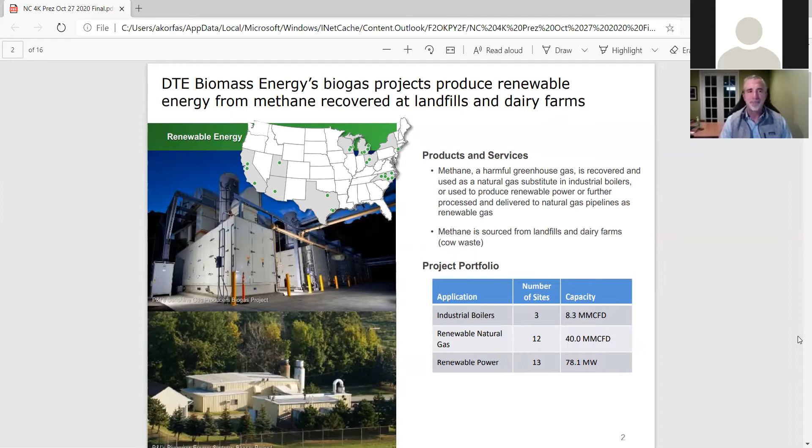We've got a fairly meaningful footprint here in the state of North Carolina, and we've got a long-standing relationship with the state. We operate 6 different projects across the state, with one of the largest in our portfolio being here in North Carolina, just outside of Winston-Salem. All of our projects here in North Carolina take biogas generated at landfills and use it as a fuel to drive either an engine or turbine-driven generators to produce renewable green electricity.

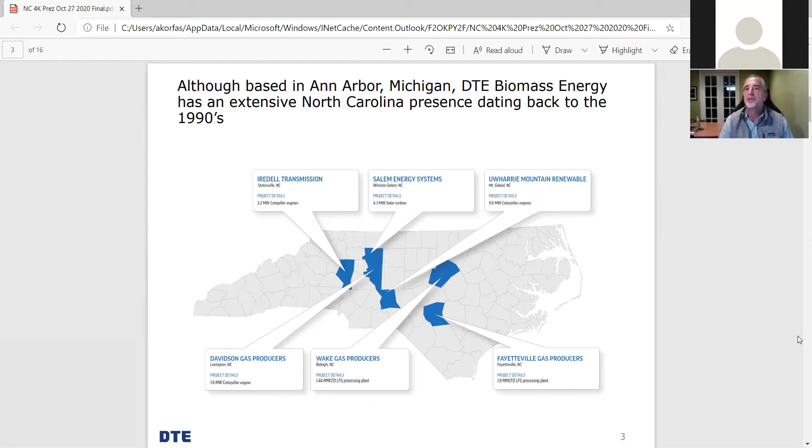So I thought I would set some high-level context relative to the external environment. I'm sure everyone is familiar with the discussion ongoing in the media and across the United States over the last several years around global warming, reducing greenhouse gases, and generally decarbonizing not only the United States, but the planet as well. This means reducing those byproducts that result from the combustion of fossil fuels, for example, to make electricity at power plants or to power the vehicles we drive. And secondly, to reduce those constituents that are naturally occurring compounds in our environment, such as methane. All of these compounds contain carbon, thus leading to the term decarbonization.

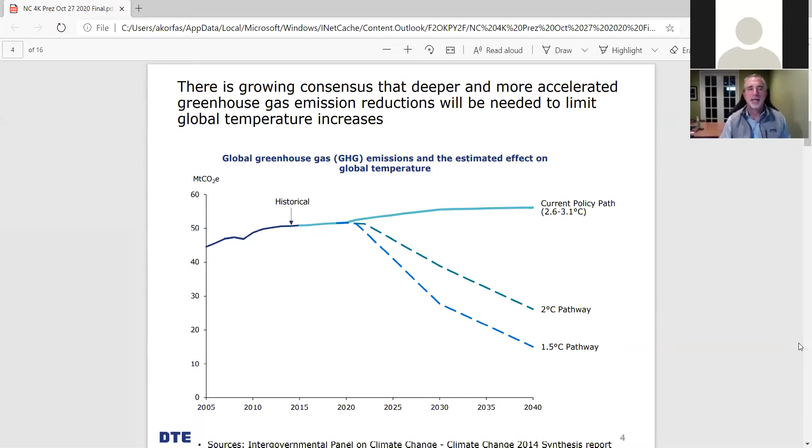So achieving carbon reduction emissions of this scale will require significant change to all sectors of the economy, not just on the power generation side. I think everybody's familiar with that and knows a lot about the wind and the solar and some of the biomass power generation that's talked about and done quite a bit of in North Carolina. But we're going to have to do some other things as well.

We're going to have to develop new, cleaner burning transportation fuels, for example, electric vehicles and hydrogen fuel cells. We're going to have to figure out a way to be more efficient in the energy we use, both in heating and cooling our homes and businesses. And finally, we're going to have to change some of our industrial processes as well, including capturing the carbon dioxide that's still emitted into the atmosphere, capturing it and then storing it underground as opposed to releasing it into the atmosphere.

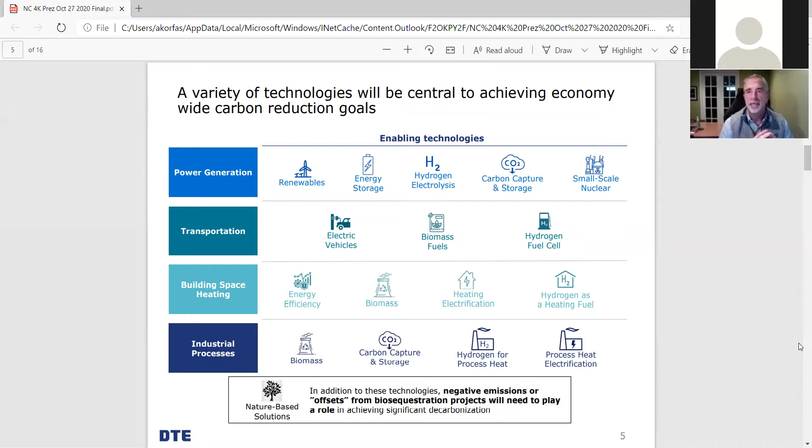So what's really cool about the work we do at DTE Biomass - we talked a lot about carbon dioxide emissions that occur predominantly at power plants and in transportation fuels, but methane is also a very prominent greenhouse gas. And even though there's not as much methane produced here in the United States, it's 23 times more potent than carbon dioxide, which causes us to really want to focus on it and reduce it.

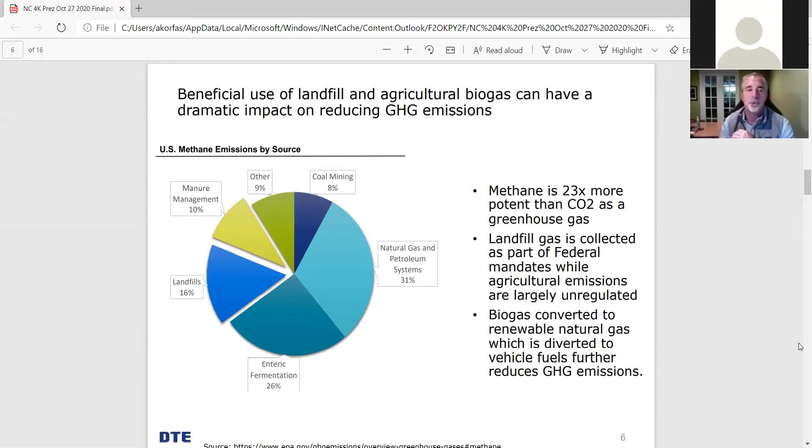When organic waste streams like manure, landfills, agricultural waste, and food processing waste decompose, biogas, which is predominantly methane, is produced, and we look to convert that to a beneficial use. Biogas, regardless of the source, is typically composed of about 50% carbon dioxide and 50% methane. If uncontrolled, landfill gas or gas from dairy manures can contribute to smog, global warming, and can actually cause health and safety concerns.

A lot of questions I often get are, what is a landfill and how is landfill gas produced? About 30 years ago, regulations at the federal level mandated and defined what we now refer to as a sanitary landfill - we don't like to call them dumps anymore. There are three main components of today's modern day landfill.

The second important system in a landfill is the leachate removal system. A lot of water builds up in a landfill structure - it's almost like a big bowl. In order to maintain the integrity of the landfill structure, you have to pump out and extract that liquid out of that bowl and take it off site for processing at a wastewater treatment plant, where it can then be safely discharged to the environment.

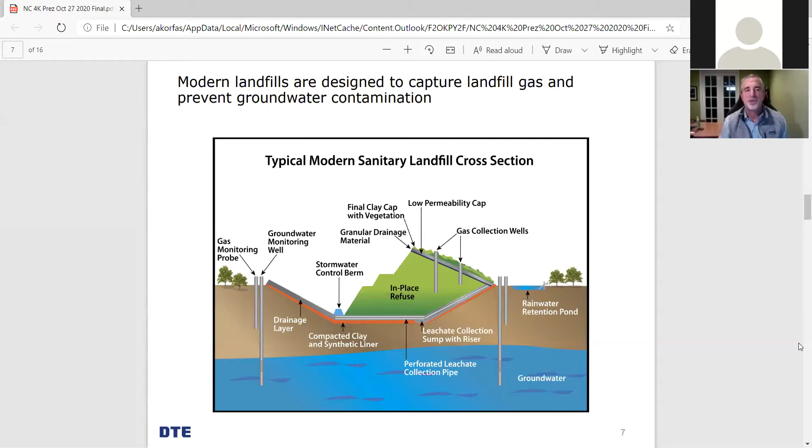Besides powering internal combustion engines, we can also use the gas to power turbines, just like you'd find on an airplane, except these are coupled to generators that produce electricity, which we can deliver onto the grid. So what you're doing here is not only destroying the methane that would ordinarily be put into the atmosphere creating a greenhouse gas, but when we sell this renewable energy to the local utility, they're able to offset their fossil fuel purchases and reduce emissions that way as well.

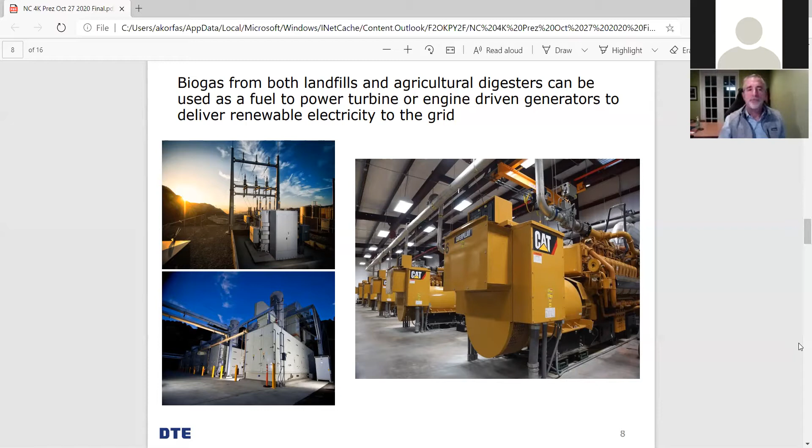We typically partner with very large farms when we install our type of projects, often at farms that have between 5,000 and 9,000 total head of cow. Today's modern day dairy operations are very modern and are integrated such that every waste stream created as part of the process is beneficially used.

Now, without a digester in place, which is very common across the country, the farmer usually puts that manure into a lagoon, and then over time it's land applied as a fertilizer. Well, that's good from a fertilizer perspective, but the problem is that methane that still resides in that lagoon and in that fertilizer releases methane that, as we've talked through this presentation, is very bad for the environment, creates a greenhouse gas, and warms the planet.

However, if we're able to come in and install a digester, this manure first can be directed to the digester where biogas is created as that manure decomposes, just like waste decomposes in a landfill. And then that gas comes out the top, which we can then direct towards a beneficial use.

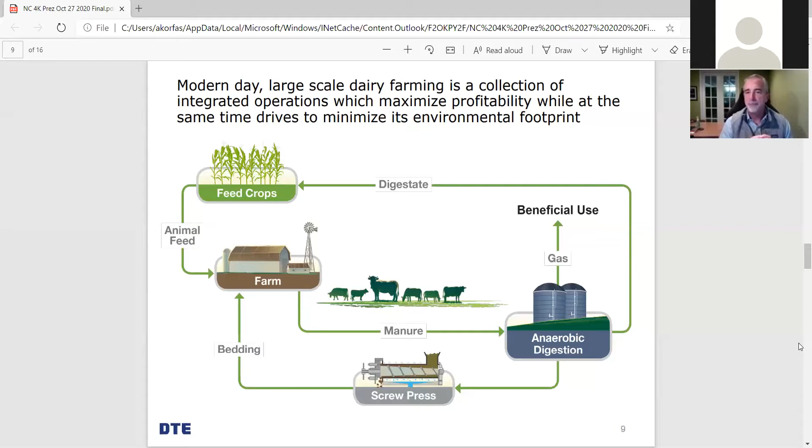Next slide. So just to pull it all together on this slide, what we're doing is taking the biogas that's generated off of dairy farms and landfill gas from landfills across the country. We're directing it to a processing facility, which I'll talk about in a second, where we extract the methane component that we actually want.

We then produce a product that we call renewable natural gas. It looks just like natural gas that flows in today's pipeline system. And then we transport it out to California, where it's used as a vehicle fuel to power CNG and LNG vehicles. So if we flip to the next slide, let's talk a little bit about the equipment used to produce that dairy gas.

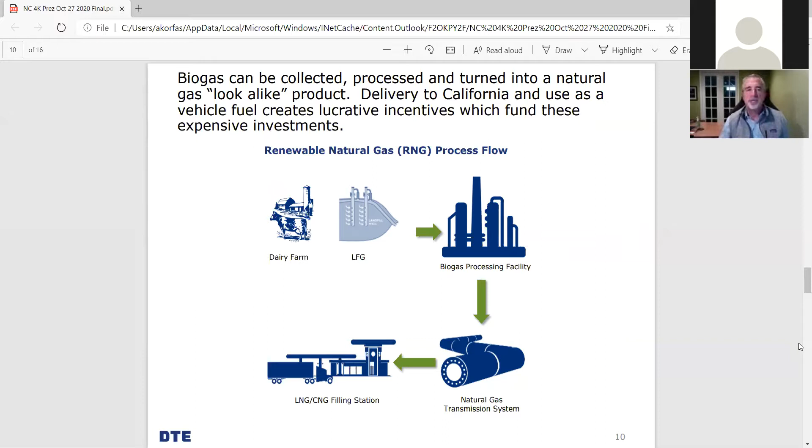The first slide here is a cartoon of a digester. I mentioned before that manure liquid mixture, which is generated continuously 24/7 at a dairy operation, is directed to these large tanks, which we call digesters.

These structures can vary in size and design. The cartoon here that I've shown is one referred to as an above ground continuous mix digester. There's also digesters that are actually below ground, that look like underground pools, where the manure mixture moves in a less continuous fashion.

Large mixers are installed inside the digester that keep the mixture continuously stirred, and heat from outside sources is used, typically through heating coils around the exterior of the tank, to keep the manure mixture at roughly 100 degrees Fahrenheit to allow the bacteria to form that results in this biogas generation.

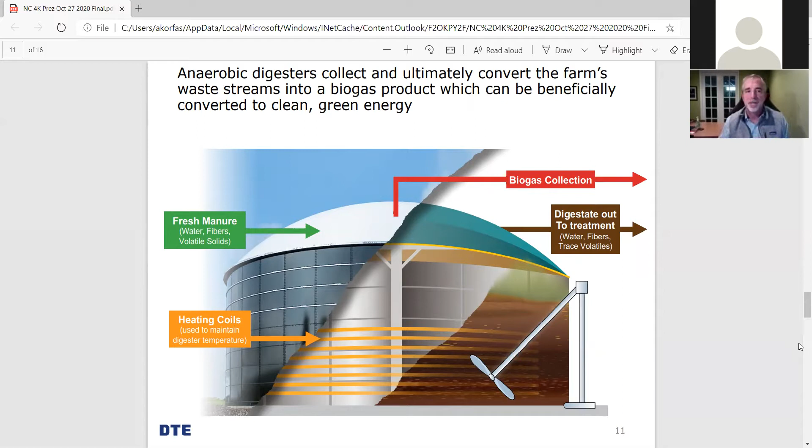The next slide actually shows a picture of two digesters. These happen to be at one of our facilities in Wisconsin. What you can see in the background on the right is a picture of two actual above ground digesters. These are roughly 800,000 gallons in size, kind of small as far as digesters go.

We've actually got some in Wisconsin that are 1 million gallons, and we're looking to build a project in South Dakota next year that will have four 2-million gallon digesters. These structures are about 30 feet high and 60 feet wide to give you a sense of scale. And then the gas forms and accumulates.

The manure typically resides, and these are sized so that the manure resides in the digester for about 20 days. At that point, the manure's been fully digested and all of the gas has been released. And these tops on these digesters are actually floating flexible roof structures, where the pressure from the gas generation helps keep them inflated.

The liquid material is returned to the farm, as I mentioned, to use as a fertilizer. And then you can see in the lower left there, the solid material after it's been dried that's now pathogen free can then be used by the farmer for bedding within the farms.

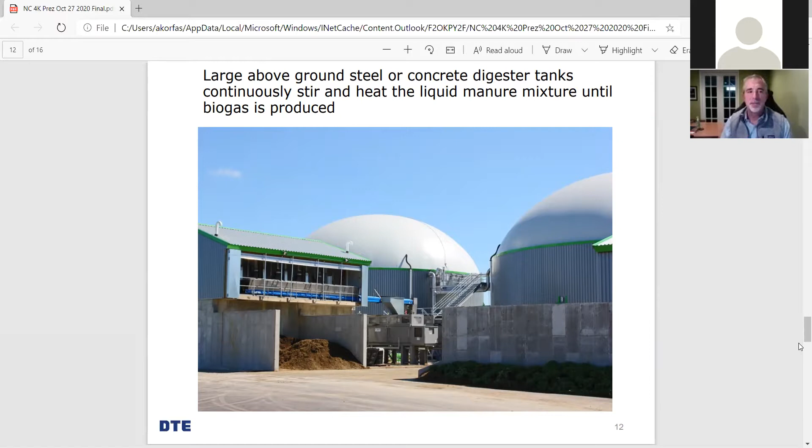So now that we've generated the biogas, we need to clean it and convert it to pipeline quality renewable gas so that it can be injected into the pipeline. There are several technologies that can be used to do this. We use what's called membrane system separation to separate the methane from the carbon dioxide, because it's the methane that we actually want to clean up and put into the pipeline.

I've got two pictures here. One is the cartoon at the left that shows a cutaway of what an actual membrane canister looks like. The zoomed in photo on the right shows an actual membrane bundle. Membranes can be described as a bundle of 1,000 microscopic, very porous straws, and in a single commercial scale cartridge, this fiber length can be as long as 1,000 miles.

What actually happens is the individual components within the gas, principally the carbon dioxide and methane, have different diffusion rates. The methane is directed in one end and moves through the interior portion of the straw all the way to the end where we collect and clean it up. The carbon dioxide moves and migrates through the axial or external part of the straw. It's collected with all the other negative constituents and waste products we're not after, in a separate stream, and then we direct that to a flare for destruction.

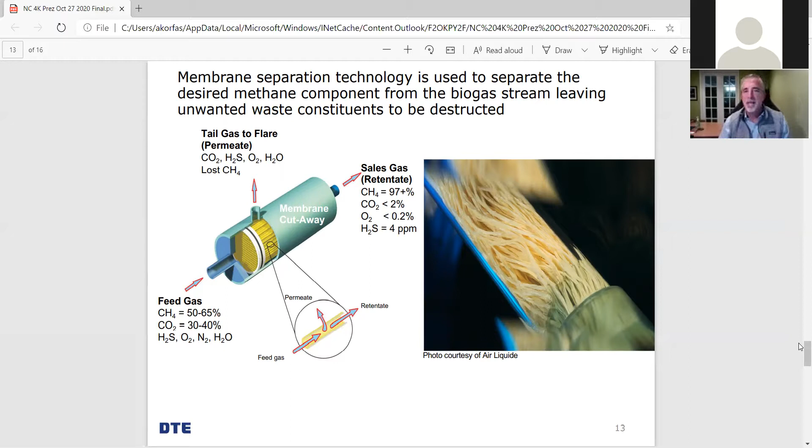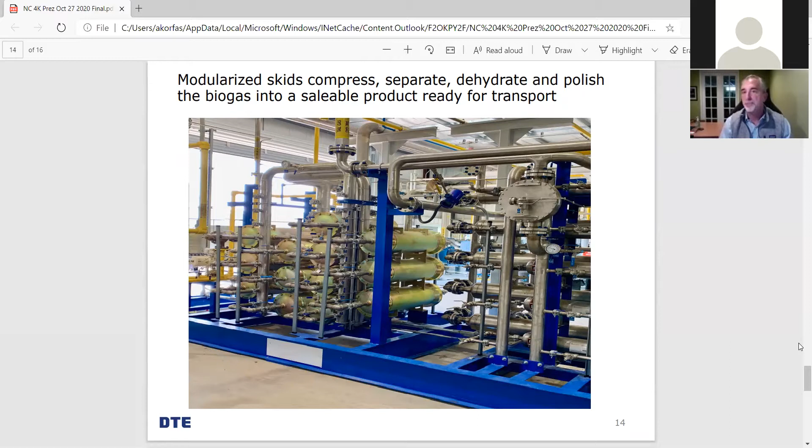The next page actually shows what one of these membrane systems or membrane plants actually looks like. You can see the membrane canisters there on the lower left, and then the rest of that skid and equipment is simply used to clean and dehydrate and compress the gas up to pressure so that we can sell it.

So now that we've created the biogas and cleaned it into a pipeline quality product, we've got to get it to market. Unfortunately, very often these large commercial farms are in very remote locations across the country and not very near natural gas pipelines. So what we've done at numerous sites is employ what's called a virtual pipeline, where we actually truck the renewable gas to one centralized injection facility and then inject it into the pipeline from there.

What we do is we actually buy these very expensive over-the-road compressed natural gas trailers that cost about $500,000 a piece. They operate at about 3,600 PSI, so very, very high pressure. And we fill these trucks up with the renewable gas.

The systems are set up so that they'll automatically switch. So if one of the trucks were to happen to fill up in the middle of the night, the system would automatically direct the gas over to the second truck. And that next morning, we'd have a driver take the full truck and direct it to our injection facility, then make a round trip back and return the truck to the farm.

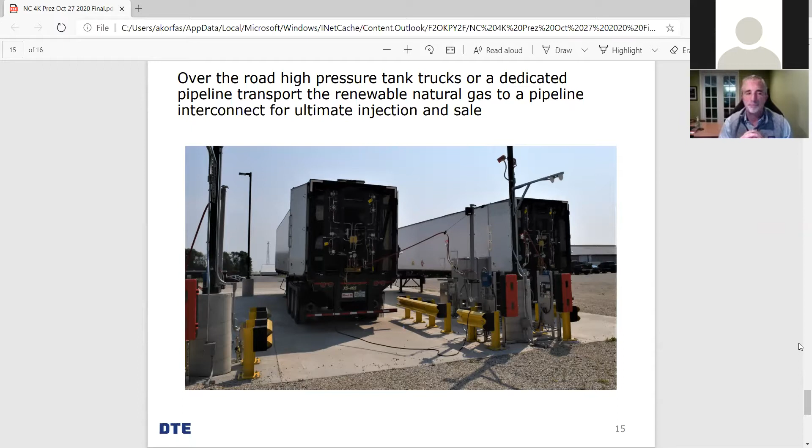Thank you so much, Mark. Sorry, I had trouble unmuting myself. So I have so many questions, and I want to ask a few. You showed pictures of these very large facilities. Is there an average cost in what goes into building these structures?

Yep, good question, Ann. It really depends and varies on whether the farmer already has a digester in place. Our early projects, the farmers already had a digester, but on the last picture I showed, we actually had to come in and build those digesters for the farmer. That project was in the order of $30 to $35 million. So the investment's fairly significant to put these in place, and quite frankly, that's why there's not a lot of them in place right now.